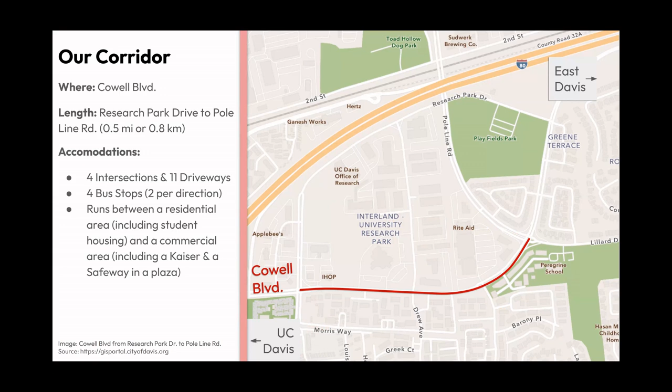Throughout that corridor, there are also 11 driveways from residential and commercial areas, and four bus stops, two per direction, used by students and locals traveling to UC Davis or East Davis.

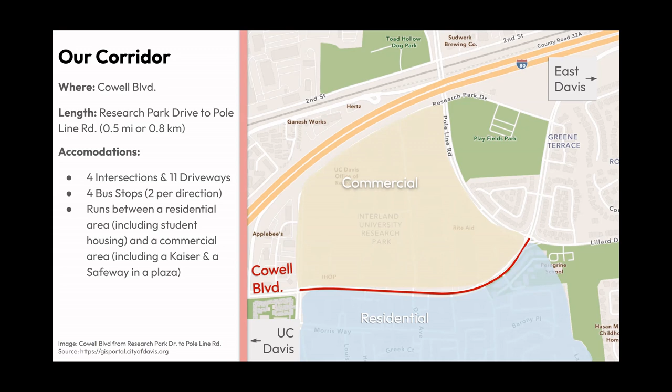There is also a lot of student housing in the residential area, and students often cross the road into the commercial area to access the Kaiser or Safeway at the plaza.

Now talking about the current status of the street: it is currently a 35 mile per hour road with two-lane traffic, one lane per direction, with a center turn lane. The traffic lane is 17 feet wide and the center turn lane is 12 feet wide.

Additionally, there is a parking lane which is 8 feet wide, and an unprotected bike lane which is 6 feet wide.

Now, talking about walkability, based on walkscore.com, we found it achieves a 73 for walkability, a score of 41 for its transit system, and a high score of 94 for bikeability, in which we found some of those points to be agreeable and some not, as presented by Yuqi. We did find some deficits in the current road system, and we will talk about it from four different perspectives: pedestrians, cyclists, buses, and cars.

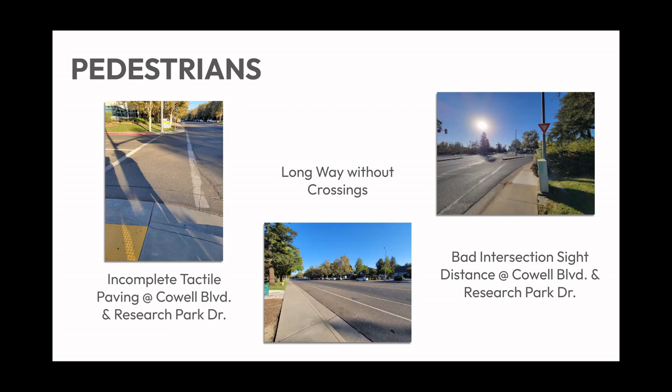Also, for drivers making a right turn at Research Park Drive, the huge landscaping will definitely obstruct their sight distance, so they have to lower their speed significantly so there's no impact to pedestrians.

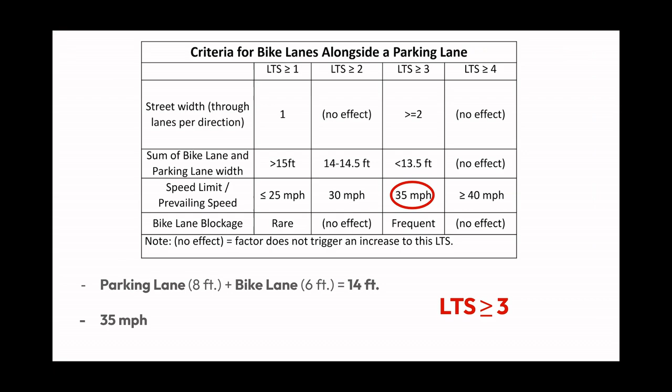For cyclists, as we measured, there's a 6 foot bike lane, and on its left is a 35 mile per hour main road for motor vehicles, which is quite uncertain and risky. Through our measurement, the bike level of service was a C, which isn't very good, and during our calculations the LTS was calculated to be greater than or equal to 3, which disproves the 94 score Benjamin mentioned earlier.

Next, for buses, we point out two bus stops that need significant improvements. The first one, close to the intersection of Research Park Drive, doesn't have shelters or any places to rest.

The other one, near the intersection of Drew Avenue, had garbage everywhere with no public staff responsible for cleaning it up—quite a mess.

Finally, for cars: vehicle volume at Research Park Drive was measured at 18,000 vehicles per day, a pretty massive amount. Also, due to the downslope near the bridges toward Research Park Drive, there's quite a bit of vehicle speeding, which is something to be noticed. Additionally, on both sides of the parking lanes, some heavy vehicles were doing loading and unloading, which is also something to notice.

Nicholas will now talk about the new design of the roadway system—a look into the future.

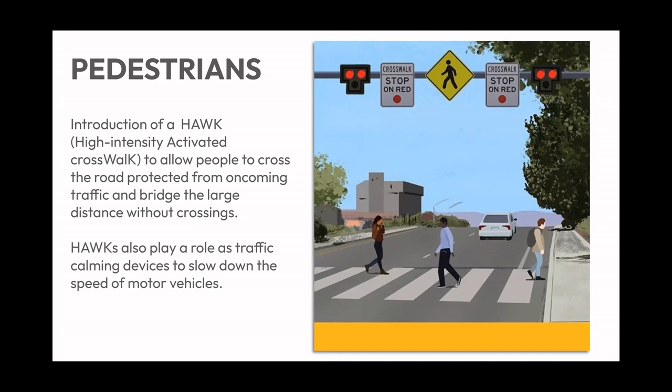What is our plan for transportation circulation? Starting with pedestrians, we would like to introduce a HAWK, a high-intensity activated crosswalk, to allow people to cross the road protected from oncoming traffic, and bridge that large gap without crossings. HAWKs also play a role as traffic calming devices, slowing down the speed of motor vehicles.

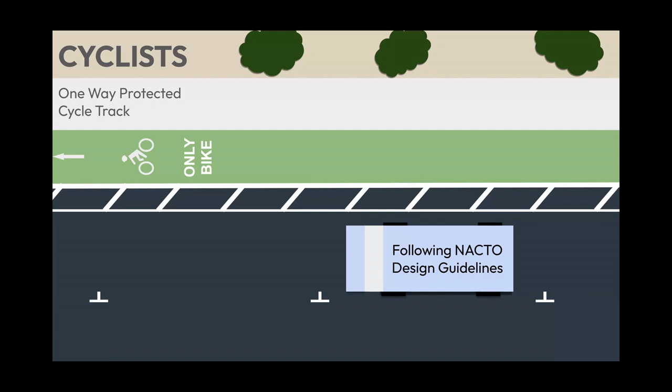For cyclists, we would like to introduce a one-way protected cycle track that follows all NACTO design guidelines. These include an 8-foot parking lane with a 3-foot buffer and a 6-foot bike-only cycle track. This would also decrease the LTS, level of traffic stress, down to 1, which is very good.

For the buses, we would like to introduce a cut design that allows buses to park and pick up passengers without impeding oncoming traffic.

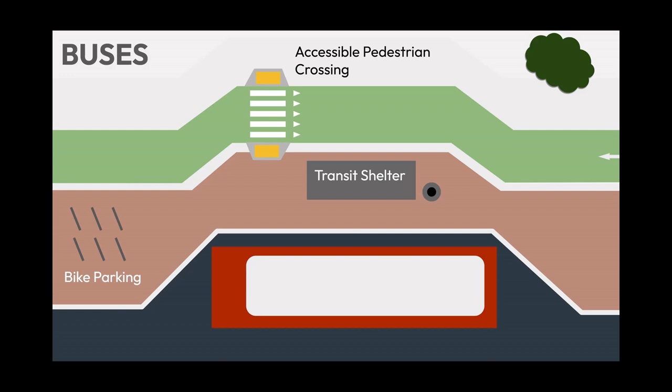For cars and trucks, we would like to have a median crossover with left turn bays, replacing the left turn lanes in the middle of the road before. This decreases the speed via horizontal deflection and increases greenery into the road rather than a wide open lane.

We'd also have a road diet, decreasing the whopping 17-foot wide lane down to a more moderate 12 feet. This also could decrease the speed, but we would also introduce a speed limit decrease from 35 miles per hour down to 30.

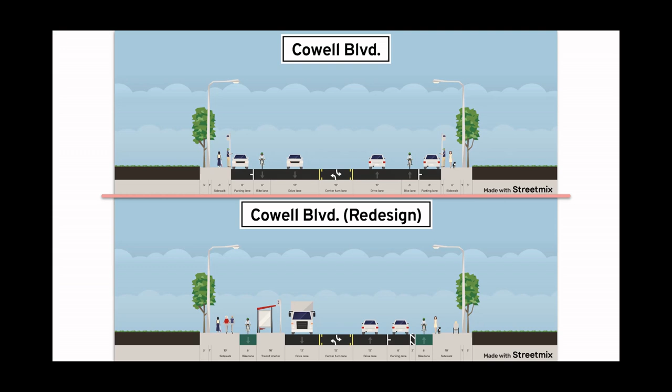For the roadway cross sections, this is the original Cowell Boulevard, and this is our redesigned version. Starting with the 6-foot cycle tracks, they would be followed by a transit shelter or parking lanes with a buffer. In the middle, we would have these reduced width drive lanes at 12 feet, and in the middle, a center turn lane or median.

And now onto Jonas with the major intersections.

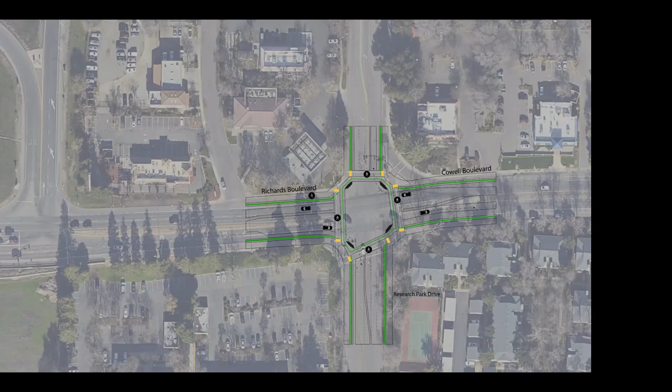And we finally implemented narrow lanes approaching the intersection to act as traffic calming. So our lanes approaching the intersection go from the original 17 feet width to just 10 feet wide.

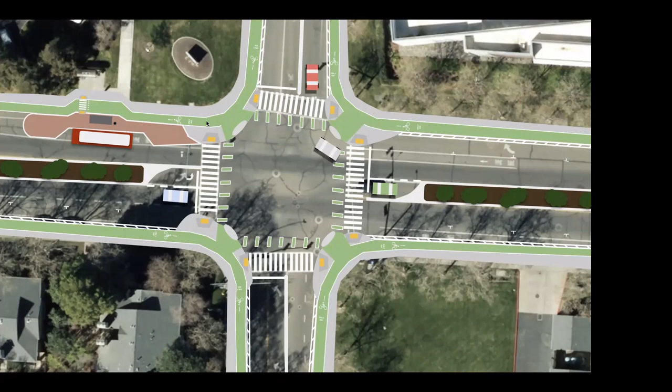And finally, what we believe is the greatest strength of our intersection design is how it flows with adjacent land uses. So we positioned the bus stop so that it's easily accessible for cyclists and pedestrians who are coming through this intersection.

So these are our proposed improvements, and through these improvements, we aim to make Cowell Boulevard a safer place for pedestrians, cyclists, bus takers, and drivers.